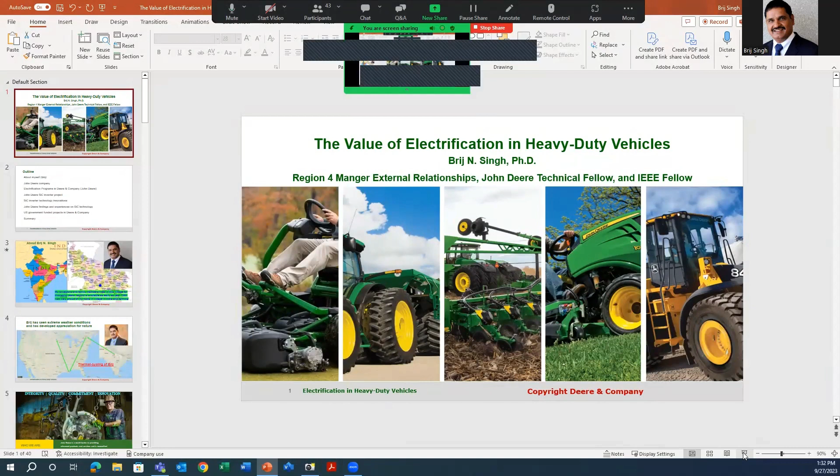Good. So today I will be talking about the value of electrification in heavy-duty vehicles. John Deere has a variety of vehicles, as you see on this screen. One vehicle looks very different from the other. So we are doing electrification for an intentional reason, meaning if the deployment of this new technology is bringing value to our customers, making them profitable, better job quality, sustainability, and also greenhouse gas reduction overall.

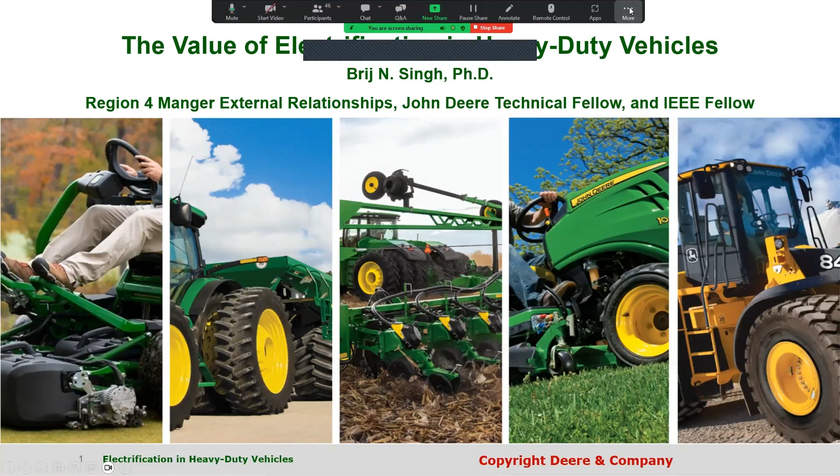Dr. Singh, can I interrupt? I think there is some kind of black screen on your front, on the top, in the middle. I can just minimize it, right? This middle one, right? Yeah, that one. It's gone, right? Yeah, it's gone. Yes, thank you.

So basically the idea is that you want to reduce the overall carbon footprint, and electrification is one of the enabling technologies. In addition to that, a variety of farming practices, including precision farming, require a lot of computational science like AI, machine learning, machine vision, perception, and things like that. So what I'm trying to say is that John Deere is a very high-tech technology company, adding value to our customers who own these vehicles and have farming, construction, mining, and turf care operations.

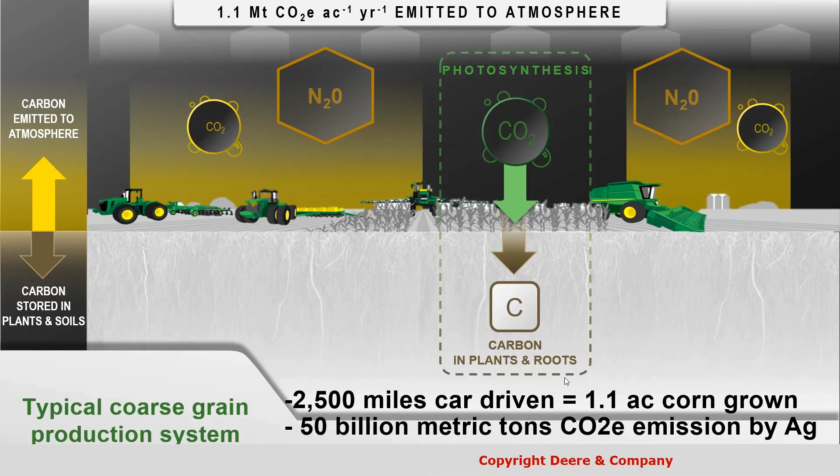So can automation, can precision agriculture minimize overall carbon intensity? So that's what we are working on, applying new technology in our product. So I will play a video here. It is just about how precisely you are putting seed on the ground. And next slide, I will explain the importance of that precision work.

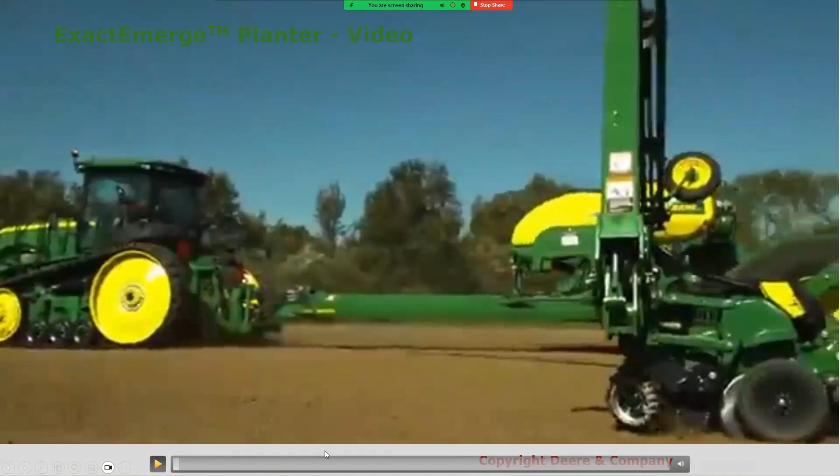Are you hearing the sound? Please confirm if you are not hearing, because it seems like, yeah, you should be hearing, sorry. Yes, we have sound.

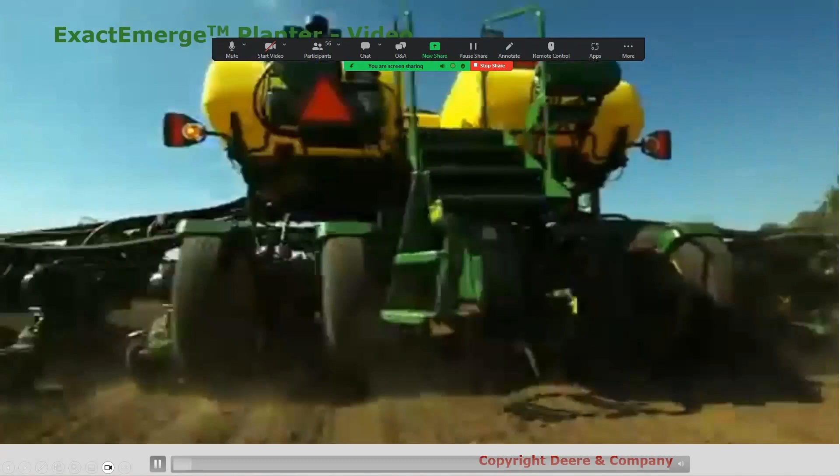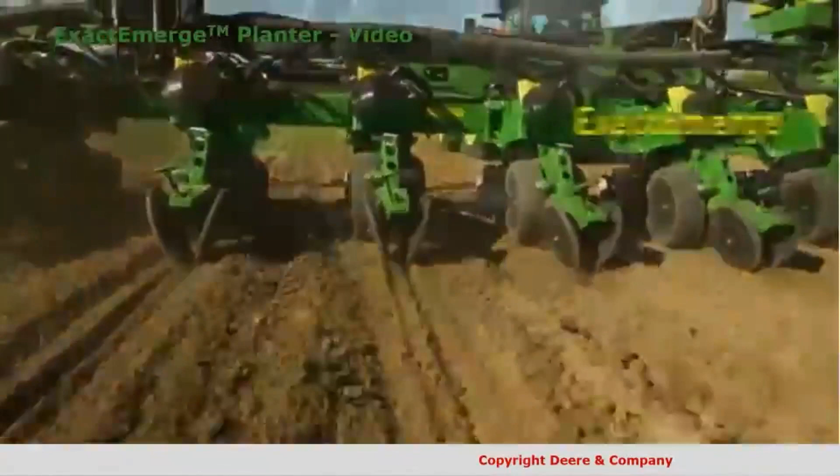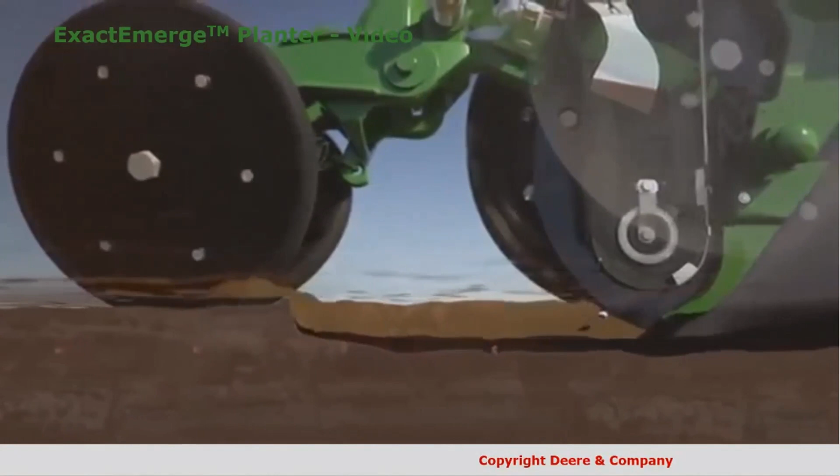At John Deere, we've continued to push the boundaries so that we can offer growers as many profit-generating options as possible. But to get to that truly next level of performance, we took a giant leap to ensure that you get higher levels of yield and productivity. Let's take a closer look at what separates the game-changing ExactEmerge from other planter row units. As you can see, there's no seed tube. Know what else you don't see? Seed rolling in the trench. We replaced the seed tube with a new delivery cartridge, the heart of this revolutionary planter technology. Inside, you'll find the brush belt, which delivers seed directly into the trench on a dead drop, with no roll, at up to 10 miles per hour.

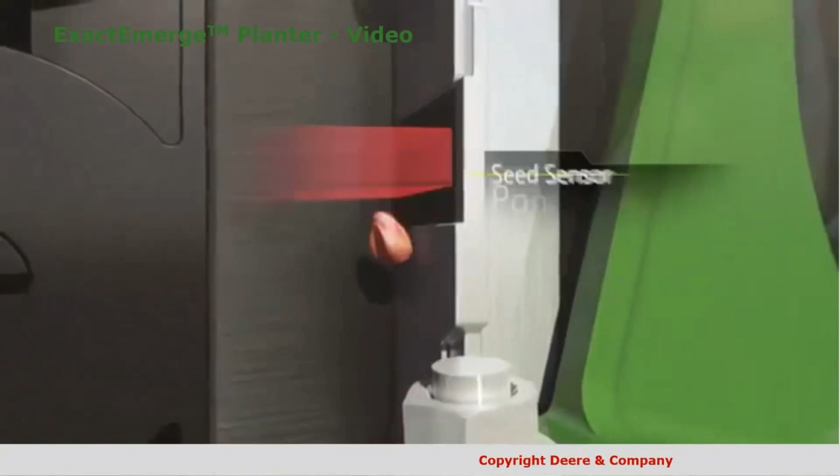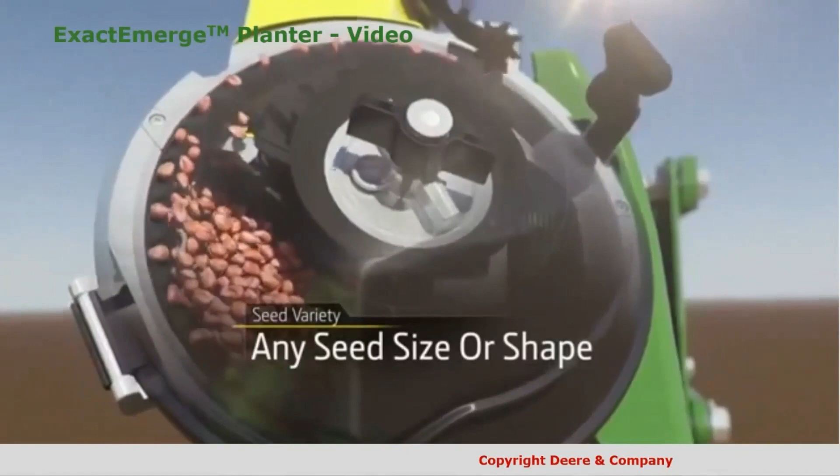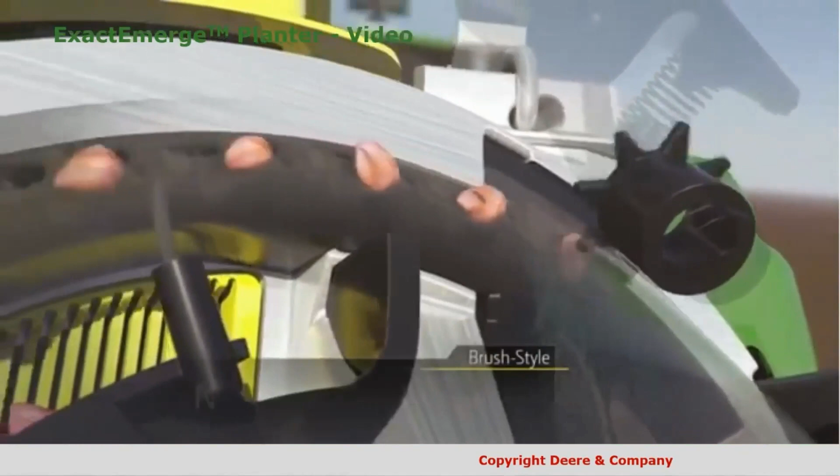Each seed is carried by the brush belt, but not before passing by our all-new seed sensor. Think of it as another set of eyes where you need them most. Population, singulation, spacing information. It's all gathered at the sensor. Every precious seed is carefully spaced and carefully placed. The new bowl-shaped disc singulates your seed, while the concave shape allows the brush to grab each one effortlessly. Watch how these paddles push seed into the center of the brush belt so you can feel confident knowing there's a secure handoff every time. And thanks to the improved brush style doubles eliminator, only one seed rests in each hole before the disc hands it over to the brush belt. This allows you to enjoy the highest possible singulation. Of course, this high-efficiency meter system wouldn't be complete without a superior vacuum.

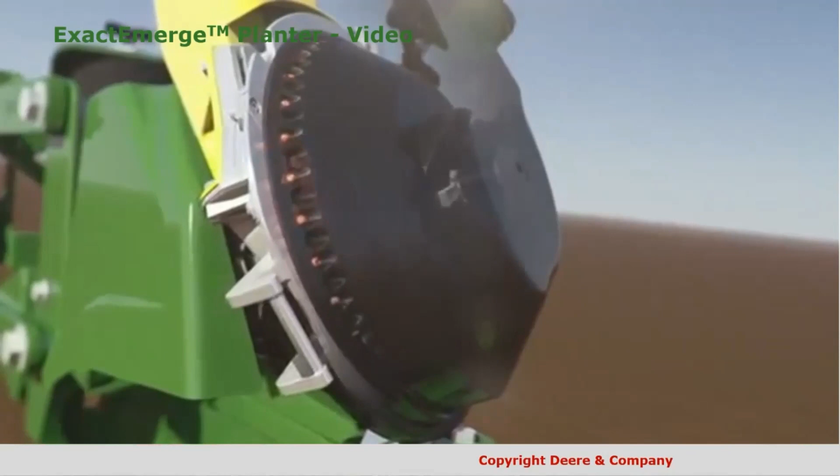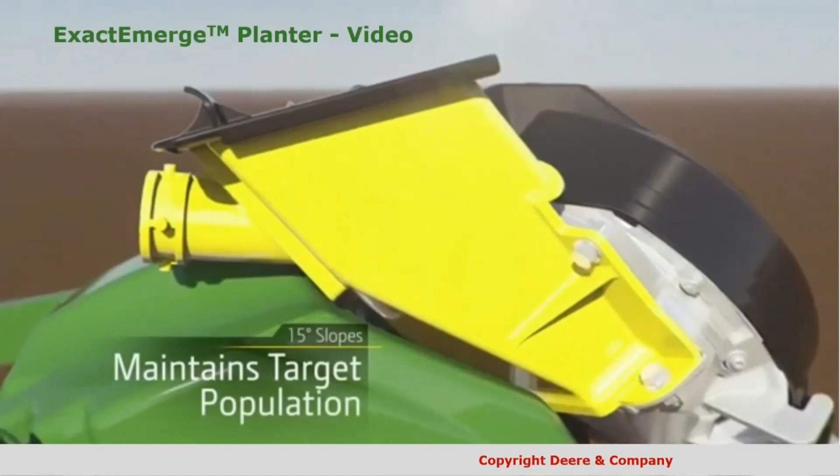That ensures the disc holds the seed tightly before it's passed on. Check out the new hopper design that helps you get the most of your seed pool by maintaining target seed population on slopes of up to 15 degrees in any direction. But there's more. 2 independent electric motors keep ExactEmerge running smoothly. One that rotates the meter, the other turns the brush belt. This gives you the speed matching delivery and population only ExactEmerge can offer.

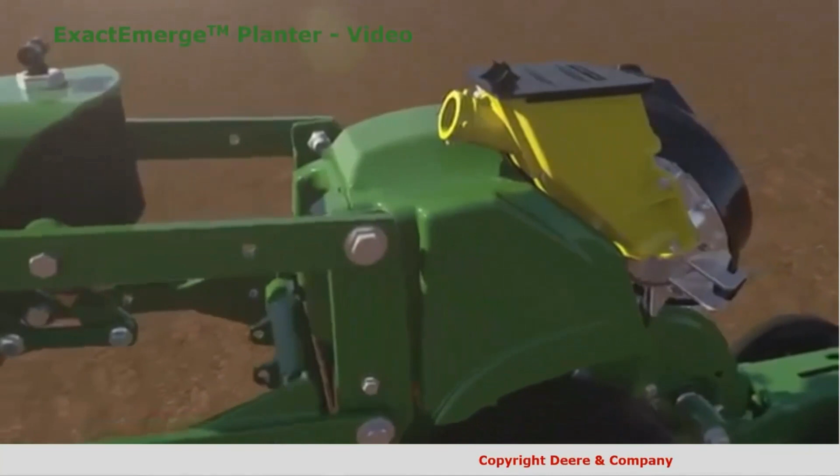Not enough? How about the fact we've made active pneumatic downforce standard on this planter? And when paired with the new brush belt delivery, you get optimal depth for maximum yield at 10 miles per hour. Just set the downforce margin you want and run confidently. It's that simple. Finally, a planter with no trade-off between speed and accuracy. A planter that buries the myth of only planting at 5 miles per hour. A planter that marries precise seed placement and productivity. It's the all-new ExactEmerge row unit from John Deere. Accurate at 10 miles per hour.

Exactly. So essentially what you saw here is that no matter what the soil condition is, you are precisely placing seed on the ground so that all the plants emerge above the ground at the same time. So that's why we began calling this product ExactEmerge. And then whether there's a 15-degree grade, elevation, all that.

And then it is like 40 robots walking behind the tractor at 10 miles per hour, and each robot is driven by GPS. So when you are turning, some of them are turning slower, some of them turning faster, so that you are making sure that the seed-to-seed spacing and row-to-row spacing is actually constant, right? Not varying, whether you go 5 miles per hour or 10 miles per hour.

So there's a science behind it: if seed placement is precise, then the grain production will go up by quite a percentage. And if you plant it at the right time, right? Because if you have a 10,000 acre farm, how can you plant, right? You need to go 3-4 times faster. So this technology has allowed us.

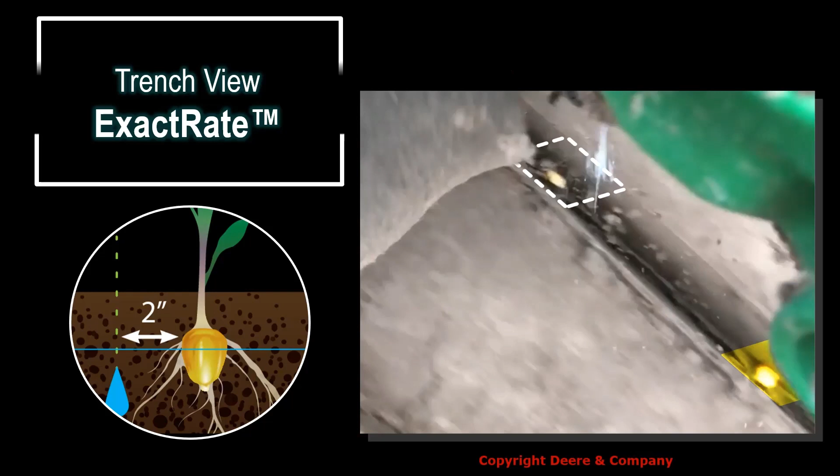So it's such a precise process. Imagine that you are going 10 miles per hour, you're turning and slowing down, whatever, and it is still able to place the seed on the ground, and still able to put a very small amount of fertilizer. You could have fertilized the entire row, right? The entire furrow, but that would be a waste of fertilizer, and that may cause carbon intensity.

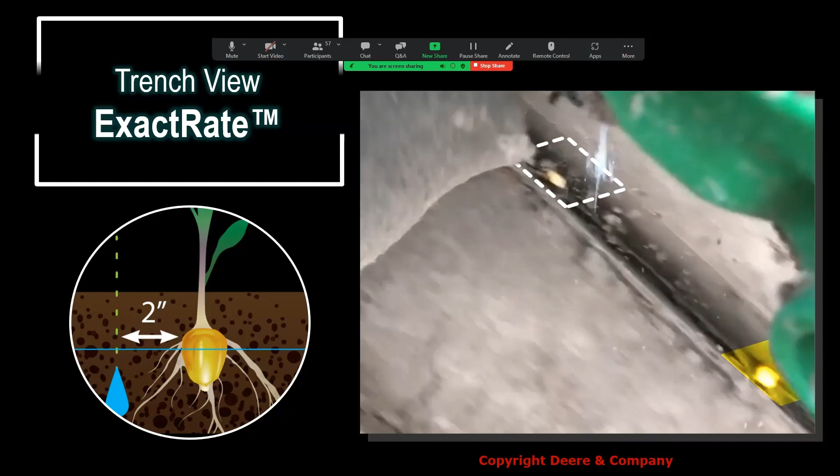So this is actually the value of electrification, and those power converter fed electric machines are actually the enabler. Before that, our previous product was about 3-4 miles per hour. This goes as high as 10 miles per hour.

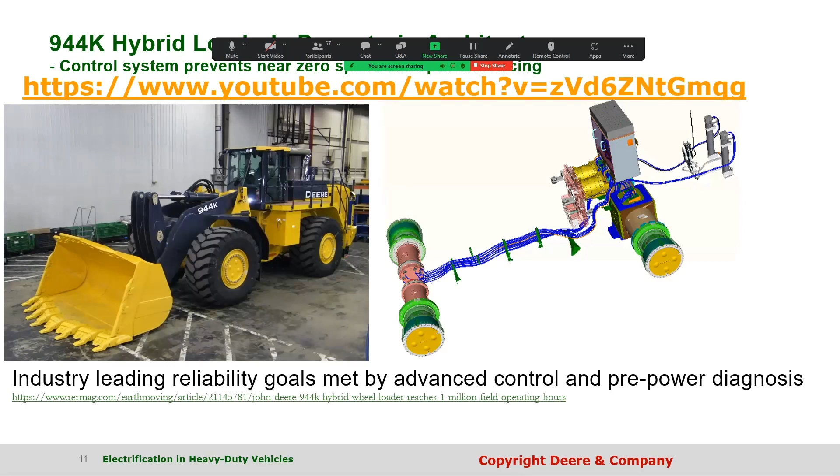So some electrification examples from when I started at Deere and Company. So this is one loader that I worked on. There's a YouTube video, I plan on not playing this, but the electronics that I designed for this may have seen close to 40 to 50 million field hours, because all the loaders that we put in customer hands have seen 1 million cumulative hours, and there are 40 such circuits that I have designed for this product. So this is how we do the reliability calculation, right?

So 40 times 1 million, 40 million, and that was 2020 data. So by now it could have exceeded that. And the good thing is that not a single failure. So as you know, Deere is known for product quality, right? So this one, without electrification, we would not be able to do it.

So Deere has the largest engine size. Now they are making another larger one, like a 20-liter engine, but the 13.8-liter engine is roughly 500 or so horsepower. If we did not do electrification, we would not be able to put together this vehicle. So there was a conventional vehicle that consumes 24 gallons of diesel per hour while working, and this one consumes under 10 gallons.

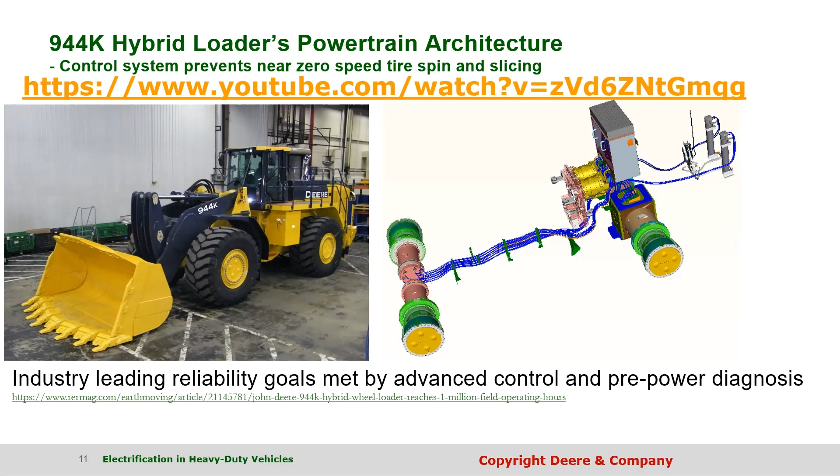So there's nearly 60% fuel saving when you begin to calculate, right? Imagine that if you burn 1 liter of diesel, depending upon whether it's petroleum diesel or a biodiesel, like an ethanol mix, it can put out as high as 12 kilograms of carbon dioxide. So by cutting from 24 gallons per hour of diesel to under 10 gallons, we are cutting a multi-million metric ton carbon footprint by electrification. So that's kind of a sustainability story.

Another thing is that control has allowed us to cancel the tire spin, because these vehicles are used in quarry mining and surface mining, not underground. Often in mining operations, the road is not paved. There are always some pointed objects, and if the tire spins, you can ruin the tire, and tires are very expensive. This is nearly a $1 million vehicle, maybe costing about $900,000.

Another beauty of this vehicle is that the ground torque is 1 million Newton meters. So that is the thrust. You can imagine that if there was an aircraft of this size, it would fly with such high thrust, but it is made to do things on the ground. Without powertrain, without electrification, we wouldn't be able to do it. So I was so blessed to contribute to this product development and its launch.

This is another product that I began working on when I joined Deere. It's a 644 loader. Here we run the engine at a constant speed, as we do in the 944 loader also. Then we produce electricity, and there's a 3-speed transmission system, depending upon the operation: transport, dozing, stockpiling, or whatever. What it is actually doing is electrification replacing the traditional torque converter. It's like energy to power conversion.

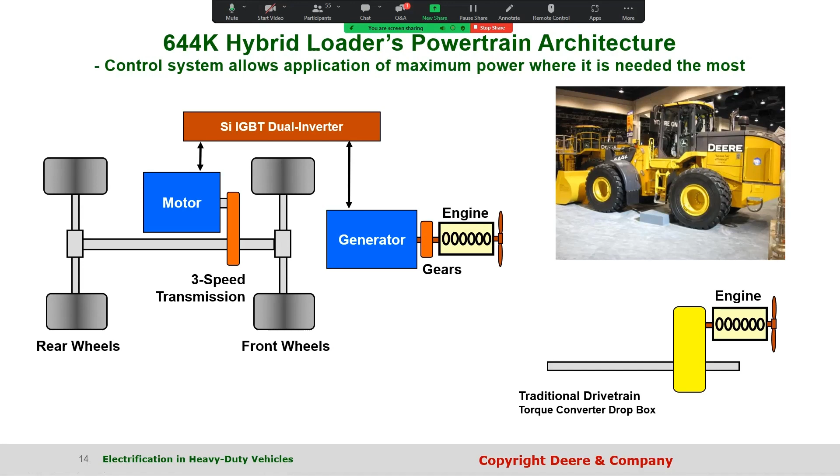So I get asked, okay, these are hybrid vehicles, what is the size of the battery? The answer is the battery is only to crank the engine. Essentially, the diesel engine spins at a nearly constant speed. It can vary now and then, but usually, compared to a hydrostatic drive, it's nearly constant speed. Then you have a gearbox, and you run the generator at 3 times the engine speed, which is about 5,400 RPM. Then you produce electricity using a power converter fed electric machine, with the generator driven in voltage mode, and the traction system driven in torque mode.

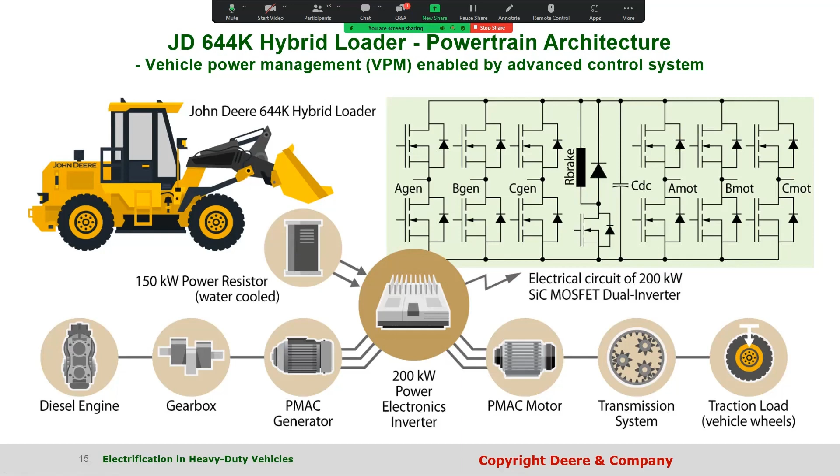When you are slowing down, for a couple of milliseconds the DC bus voltage can go higher than the designed value, so you burn that electricity in this power resistor. It's actually a 150 kilowatt water-cooled resistor. If we did not do that, we would not be able to control the vehicle. So now, if we begin putting in a battery, we can absorb that energy. When we were designing this in the 2007-8 timeframe, battery technology wasn't mature enough and cost wasn't down. But now we can begin putting in batteries, and we began really calling them hybrid drives. You have battery power and engine power, you run the engine at a constant speed, and peak power comes from the battery.

So now I will talk about John Deere's product in PowerAmerica. When President Obama was in office, he began establishing manufacturing innovation institutes across the US. PowerAmerica was the second institute. It was a $140 million effort from the US government, funded by the Department of Energy. And Deere is a founding member of PowerAmerica.

So we drew quite a bit of funding from Power America, and we developed very, very advanced inverter technology. Actually, my IEEE award, the Emerging Tech Award, was based on this work I did for the company and for DOE. So we were given a very, very aggressive goal in the 2013 timeframe: a very, very highly efficient inverter, lightweight, small size, and all that. And then also, as compared to a hydrostatic drive, this inverter should offer more than 25% fuel economy.

And then another objective we signed was that because these wide band gap materials, silicon carbide and gallium nitride, are high temperature materials. These are new generation materials. You can operate them at high voltage, high temperature, high switching frequency, and silicon carbide has a high thermal conductivity. And then failure due to cosmic radiation is not as pronounced as it is in silicon semiconductors. So you can really exploit all these unique properties that are absent in silicon semiconductors. So we wanted to exploit all of them. So that's where the 115-degree number came from.

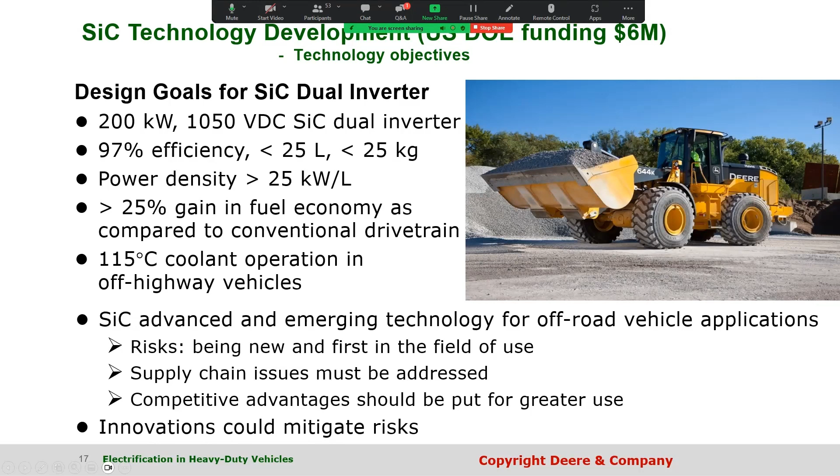And how you could do that is by innovation. So you remember those four core values, innovation is one of them, right? So people like me, and there are many such engineers in the company, are all continuously innovating new products, new technology. Where we ended up after the conclusion of the project: we started in 2015 and in 2021 we graduated the program. So we had a very high power density goal, and we nearly doubled the power density. So a very small size inverter. Next slide, you will see how much smaller it became.

And then the efficiency: 97%, two-stage, power taken in to the inverter, power out from the inverter, because there were two inverters packaged in the same box, more than 97% efficiency. And over the coolant, we proved efficiency of 98% and higher. One inverter alone is 99 point some percent. So very high efficiency inverter technology. And then we did 2-3 generations of development. A lot of innovation went into packaging, thermal management, and things like that. You will see there's a video on it.

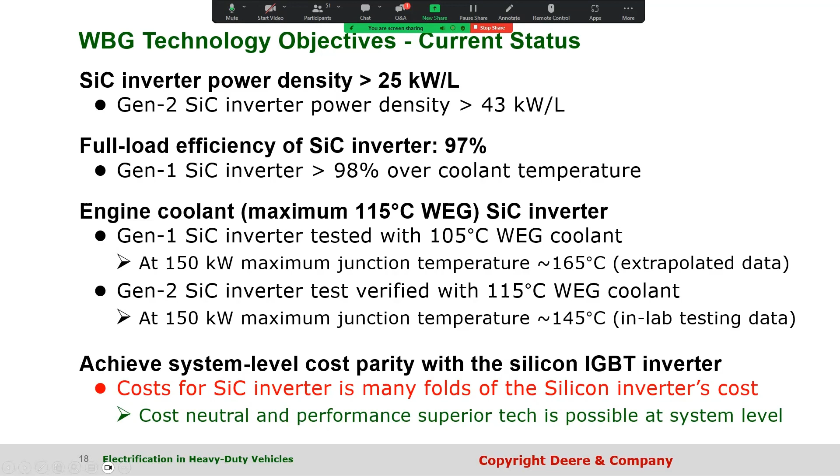So imagine that when we ran, we increased the coolant temperature by 10 degrees, and the inverter was running about 20 degrees lower temperature. And it is all about paying attention to basics like packaging, thermal management, and making sure you are not putting a lot of thermal resistance from the semiconductor to the cooling system in the inverter. And no matter how good this technology is, if it doesn't meet the cost target, it doesn't go anywhere. So our 5-year work indicated that at system level we can design a cost neutral and performance superior solution, and that led us to launch a production program. So in a few years down the road, you will see silicon carbide inverter driven tractors in the market.

And then also the capacitor size reduction. I know in this class maybe a lot of power system engineers are there, but you need to attack this problem from the control standpoint, packaging, thermal management, all that. And we exploited the unique properties of silicon carbide and reduced the capacitor in this inverter from 13,000 microfarad to as little as 440 microfarad. So even if devices are expensive, if you take the system approach, you can get a cost neutral, performance superior solution, and you can deploy such technology.

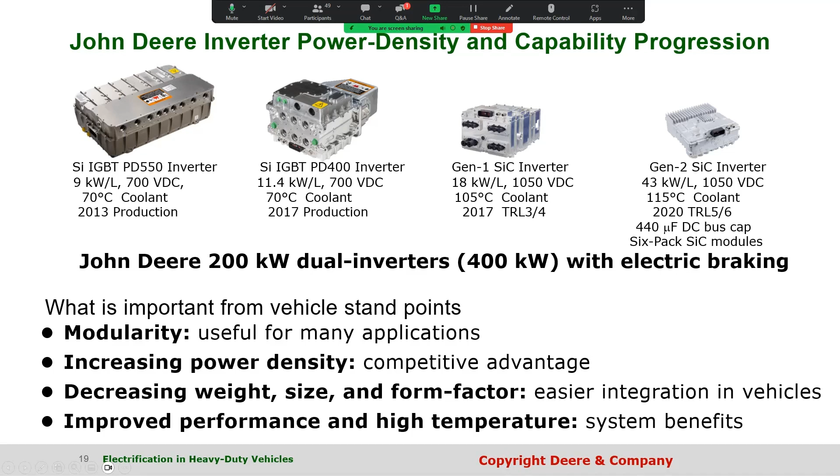Decreasing size and weight, form factor gives easier integration. I once toured our loader factory in Davenport, Iowa, and the fact that a vehicle can rotate to the same manufacturing station over and over, that's adding manufacturing cost. So if you minimize the component size, that can help cut down the manufacturing steps, so it lowers your manufacturing cost, and either you are more profitable or you are passing that saving to your customer, and you are more competitive. And improved performance and high temperature gave us system benefit, easier integration on the system.

So why are off-road vehicles so different? It is the near zero speed requirement and stall torque. As you know, on-road vehicles, you accelerate and you go, right? Off-road vehicles, if you want to go from point A to B, oftentimes you must hit something, right? You hit crop, you hit tree, you hit concrete. On-road, you want to go from point A to B without hitting anything, right? That's a very different design paradigm.

And then oftentimes you are operating near zero speed. And that is very, very taxing to the power electronics. So design requirements as compared to on-road vehicles are quite different. So we need to be mindful about that and design the product for how these are being used in the field. So we did 3 generations of silicon carbide work.

As some of you may be acquiring government funding — writing the grant application and all that is not easy, but I would say an easy process. Doing the work, doing the project is completely different, right? A different magnitude of difficulty. So when I had this funding, at that time we did not have any idea about what silicon carbide is all about, just book knowledge. So the idea was that if you are working on some risky technology and you have risk of failure, then fail fast or experience fast and move on.

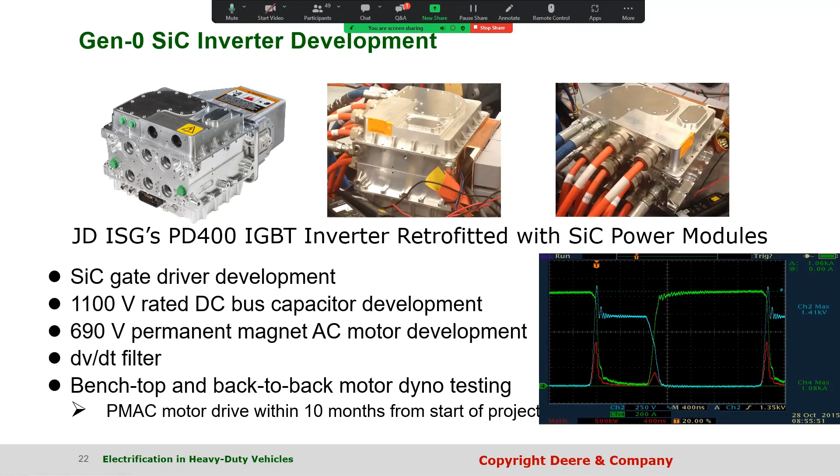So we did gate drive design, we did capacitor design, all in-house. We took our PD400 production inverter and pretty much retrofitted it with the silicon carbide module and capacitor. We also did some dV/dt filter, meaning making sure that a motor fed from this inverter doesn't experience a lot of transients, sudden voltage swings and all that. That's detrimental to insulation, bearing current, common mode voltage and current issues. But with no knowledge in this technology, within 10 months, we were spinning the electric machine with silicon carbide. So that's kind of the beauty: if you are in the technology development space, speed and scale are extremely important to be successful.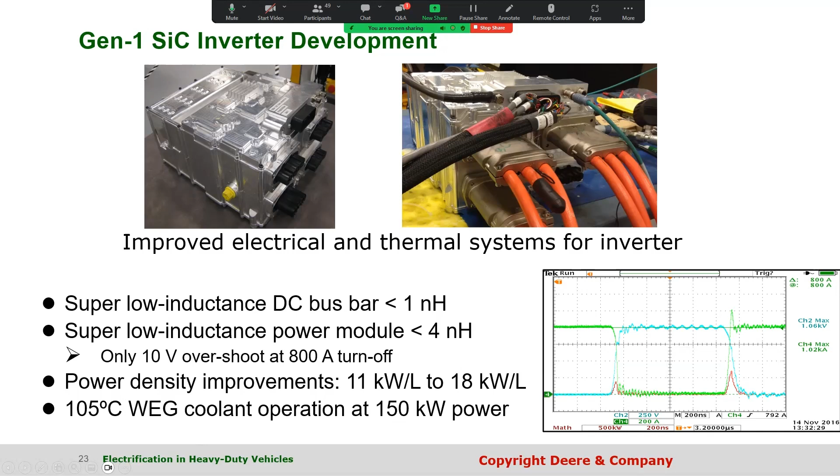Then we put our Gen 1 inverter, which is basically its own silicon carbide inverter in its own housing. Remember, our goal was 25 kilowatt per liter. We missed that goal, but we applied a super low inductance bus bar, nice packaging, thermal management, and we qualified that indeed this can run with engine coolant and continuously operate at 150 kilowatt power and 200 kilowatt peak power. And then in 2017, Deere management had quite a bit of funding for me and the team.

You saw those boxes, right? Sometimes both inverters are sandwiching the cold plate. In this case, it was different. So minimizing the inductance between generator and traction inverter helped us develop advanced control. And then we achieved our power density goal.

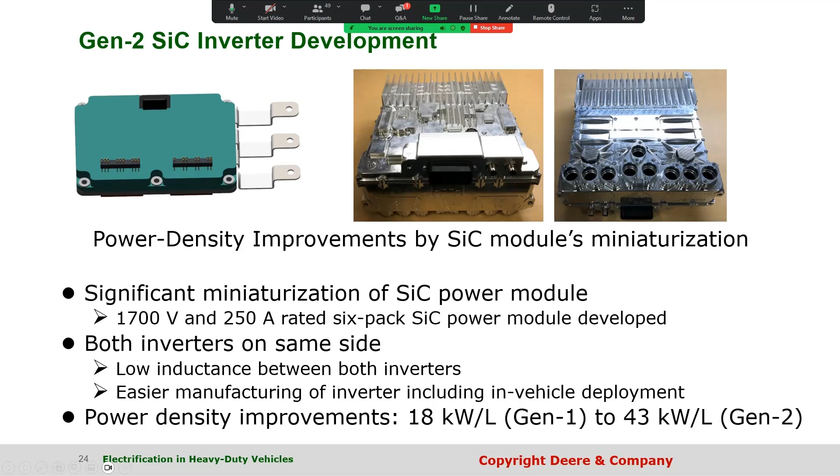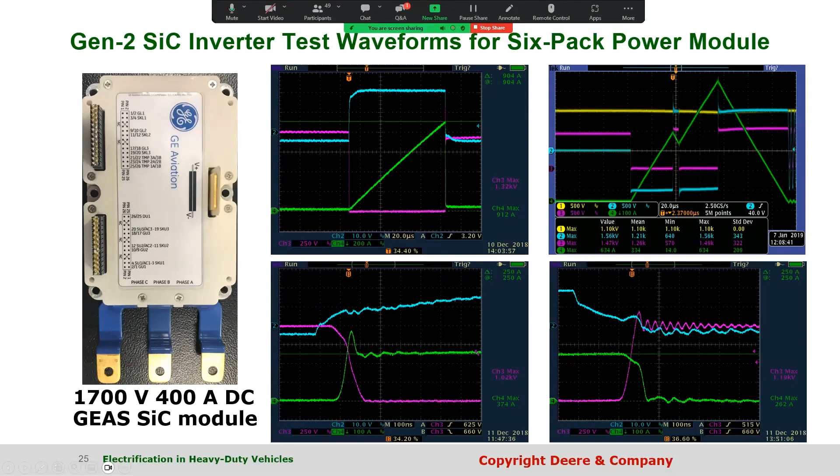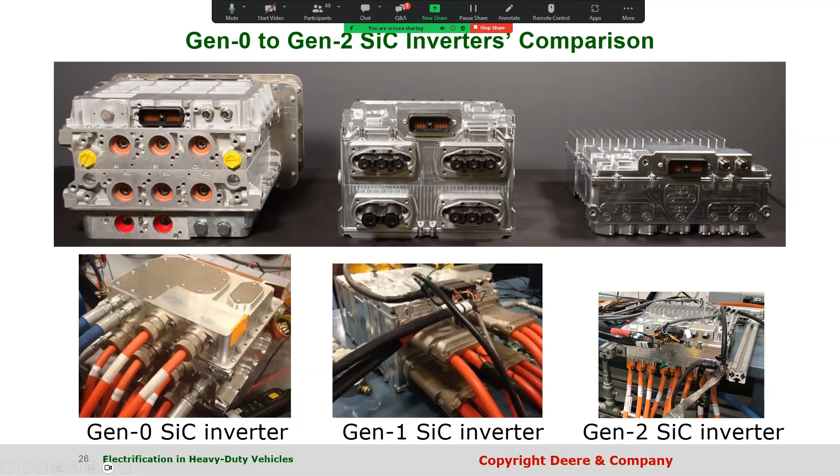So from those $6 million plus quite a bit of funding from Deere, this project became nearly a $12+ million program, and we got from here to here in 5 years. So it takes quite a bit of effort to get this done. From a 35 kilogram inverter to under 9 kilograms, much smaller footprint, a lot less material, easy to put motor and inverter together, and essentially we can even eliminate the cables here. And that's one trend I'm seeing in industry: people are putting inverter and motor together in advanced cars, so it's coming, and Deere is doing it too.

So I think I have time, so I'll play this video. And this will talk about quite a bit of innovation that has gone into our silicon carbide program.

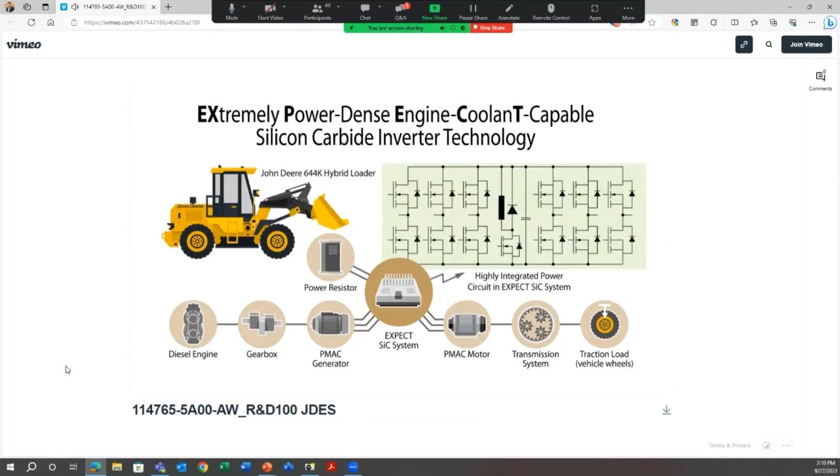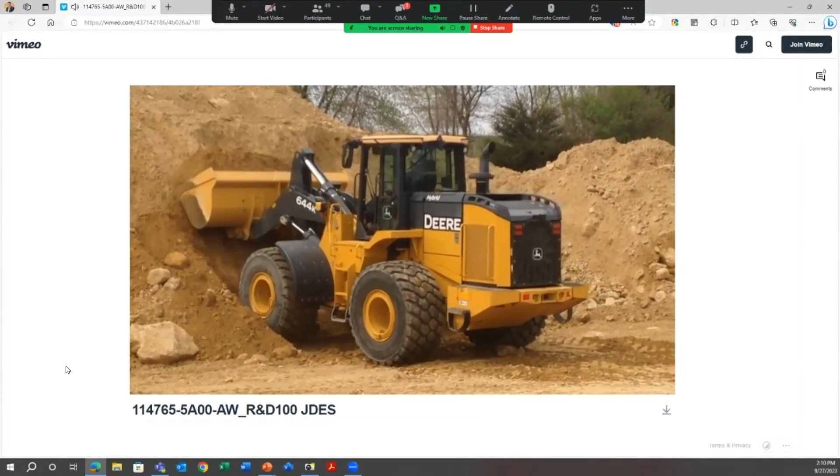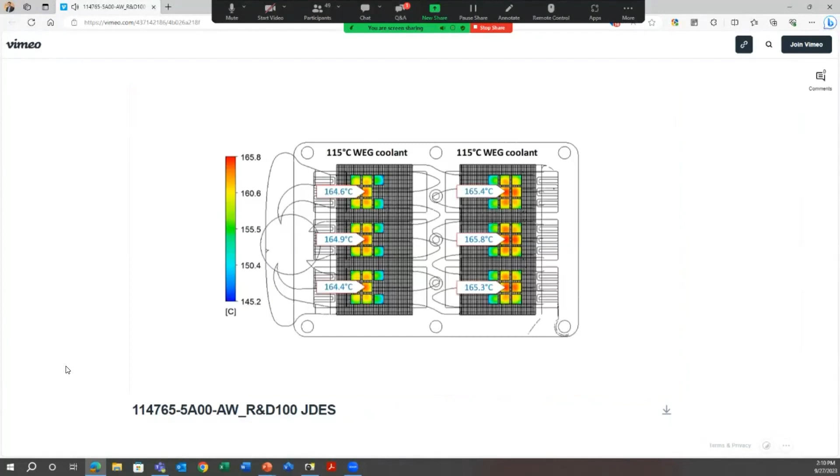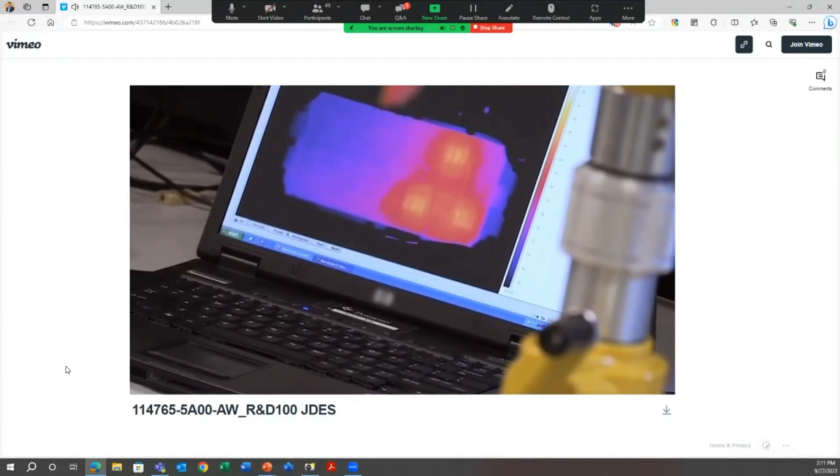Introducing the first of its kind, extremely power-dense, engine coolant capable silicon carbide inverter technology for the electrification of heavy-duty vehicles from John Deere Electronic Solutions and the National Renewable Energy Laboratory. The compact, market-ready Expect technology offers high efficiency and high performance power at the extreme temperatures required of heavy-duty construction, mining, agriculture vehicles, and on-highway trucks and buses. The market-ready EXPECT silicon carbide technology can enable companies to meet emissions guidelines without sacrificing vehicle reliability. Key achievements in the design of the Expect technology enable a higher power density of 43 kilowatts per liter alongside advanced circuit protection and thermal management for coolant temperatures up to 115 degrees Celsius. The converter system also has the potential to increase fuel economy and reduce daily operating costs.

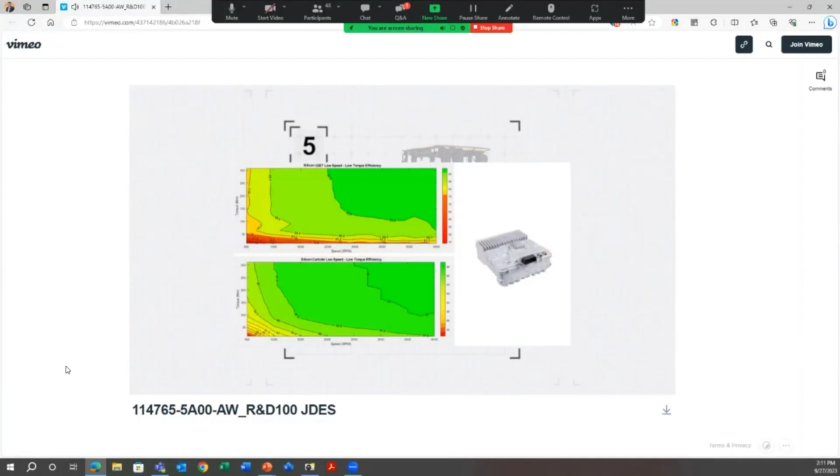These achievements include: 1. Packaging innovations combining 2 silicon carbide inverters. 2. A power module with integrated thermal management for engine coolant integration. 3. Gate driver design to enable high temperature operation. 4. Advanced protection features necessary for fast switching silicon carbide power devices. 5. Very high converter efficiency at full load and significantly improved efficiency at partial load. 6. Clamp-on current sensor technology for manufacturing simplifications and hotspot temperature elimination. 7. Active and effective cooling to prevent heat spread from the electric motor to the converter. 8. Novel packaging of optimal size DC bus capacitor module to prevent capacitor overheating. The market-ready EXPECT silicon carbide technology can enable increased fuel economy, improved inverter and motor assembly without requiring power cables and power connectors, improved integration of electric drivetrain in heavy-duty vehicles, simplified vehicle architecture, eliminated dedicated cooling pack for inverter, and reduced daily operating costs due to increased fuel economy.

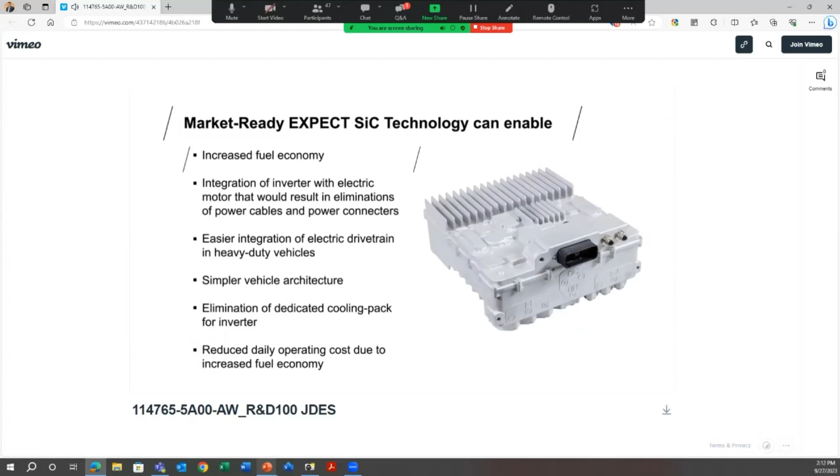So one of the pictures that you saw in the video talked about partial load efficiency. In an on-road vehicle, like I'm driving a hybrid, right? My car has a power mode, eco mode, and also a charging mode. Essentially, most of the time the vehicle operates in eco mode. That means your engine is putting out about 30% load; the overall powertrain is putting out 30%. So you don't need to be super efficient at full load, because the majority of the time, unless you are hill climbing, you aren't operating at full power, right? So partial load efficiency is extremely important.

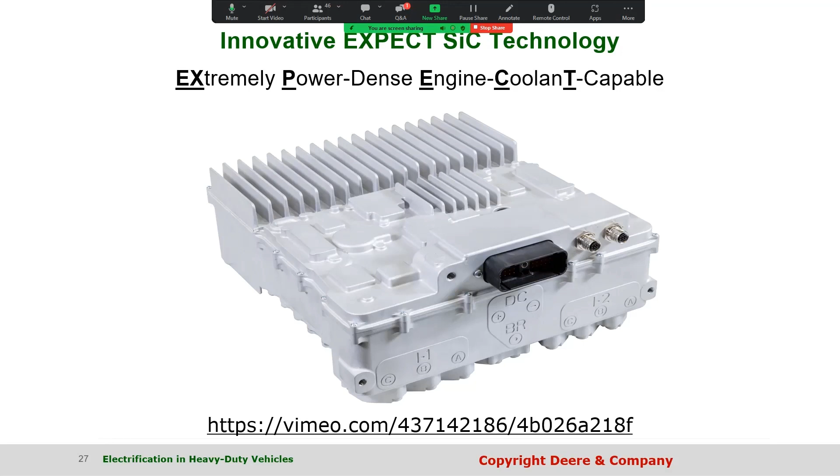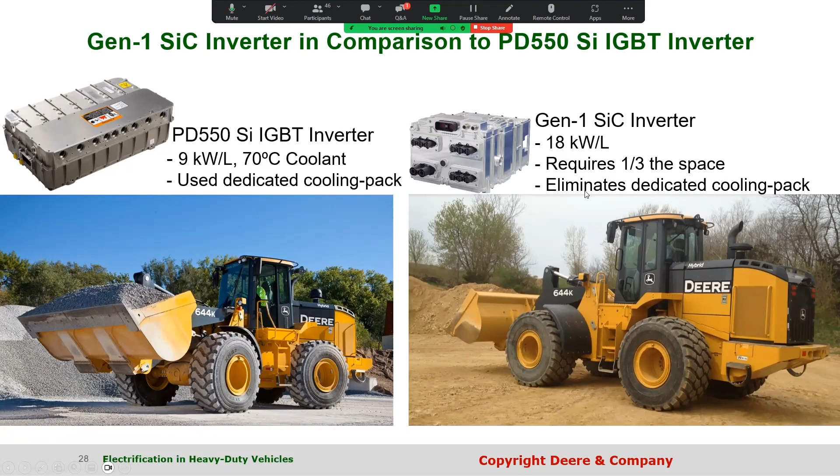So then we had this PD550 inverter that went into our production 644 loader. We hosted DOE and put in our Gen 1 inverter; we needed to modify the cabinet. Actually, the inverter is right there, but you climb in the cab. It requires much less space, and Gen 2 is even much smaller than that.

So what are the lessons we learned? IGBT mindset, like traditional mindset, doesn't work. You need to go out and exploit the unique property of the material, wide bandgap silicon carbide material properties that I mentioned earlier, and you need to pay attention to overvoltage, cable, connector, all that. And one of the experiences: when you talk to inverter experts, they would tell you the connector is one of the things that fail. So you need to pay attention to these low-hanging fruits that people often ignore.

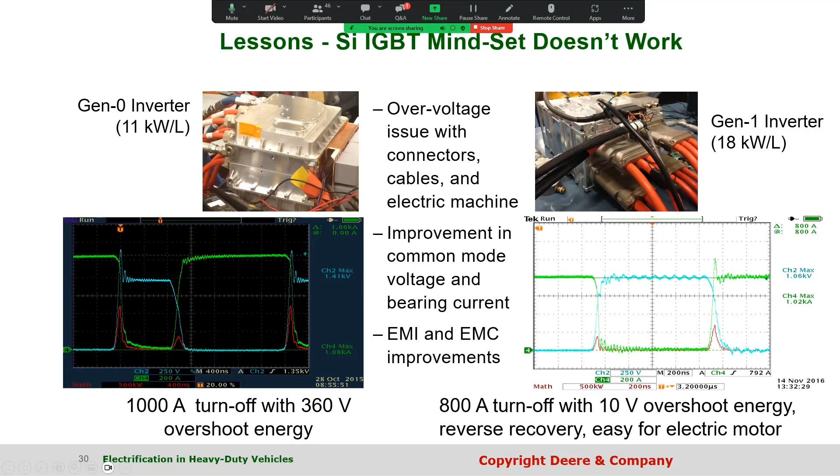And then you need to pay attention to common mode voltage, current, EMI, EMC. And when we did good packaging, our Gen 1 inverter has very low overvoltage. So when you are turning off the device and the device turns off with a transient like this, it's very, very bad for the health of the motor bearing, motor insulation, all that. So this technology, nice packaging, has allowed us to cancel these effects, and also solve the EMI, EMC issue.

So then we thought, okay, let's qualify it over a wide range of ambient and coolant temperature. So we swept the ambient condition, going up to 75-degree ambient. And once we ran coolant more than 90 degrees C, we couldn't operate at more than 60 kilowatt continuous. We wanted to operate 150 kilowatt continuous, 200 kilowatt peak power. We couldn't do it. And the reason is that it was not the power module heating up. There were some components heating up.

So heat rises. Usually 95% plus of the heat produced by the power module is taken by the coolant system, but 5%, that's what heats the air inside the box. So if you do thermal management, thermal treatment, once we did that, we were able to run 55 ambient, 115 degrees C coolant continuously flowing through the inverter, no issue whatsoever. And the beauty is that the capacitor was 85 degrees C technology, a lot of low voltage electronics was 85, but this is 175 degrees C technology. So packaging and thermal management has allowed us to marry technologies of different temperatures.

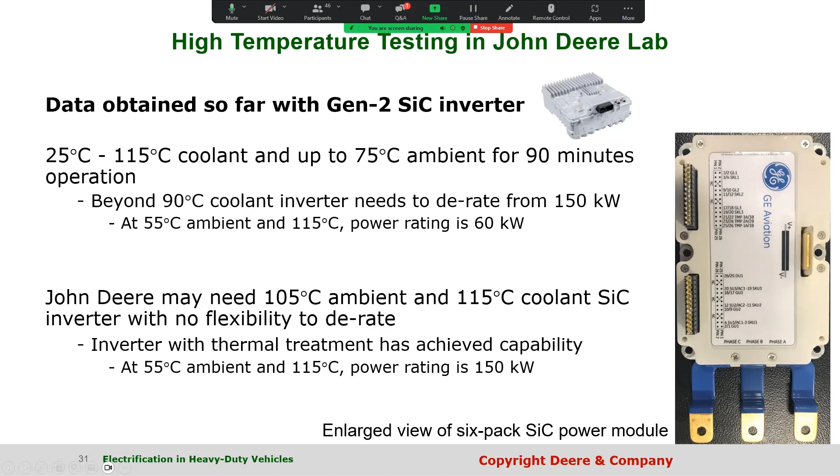So then innovation by 9C solutions. So when I started this project, I began counting those Cs. So can we reduce the capacitor? We did. We reduced the capacitor size by 5 times, cost by 10 times. We went from 70 degree coolant to 115. So we can simplify the vehicle architecture. The connector was simplified. Then the overall size of the inverter went down, and the material intensity in the product went down.

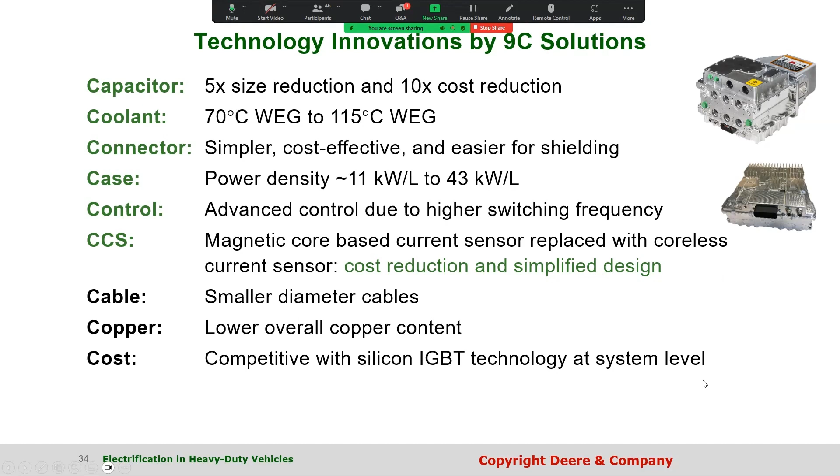We applied advanced control. We used a coreless current sensor. In a current sensor, actually, the heating happens because of the switching frequency, because of the fundamental frequency, and because of the fundamental value of the current. So the magnetic core heats up in the sensor, so we eliminated the core itself and ran a coreless current sensor. A lot of treatment was needed, but we were successful. We are in the process of eliminating cable. We cut down a lot of copper. And of course, at system level, we are competitive compared to traditional silicon IGBT technology.

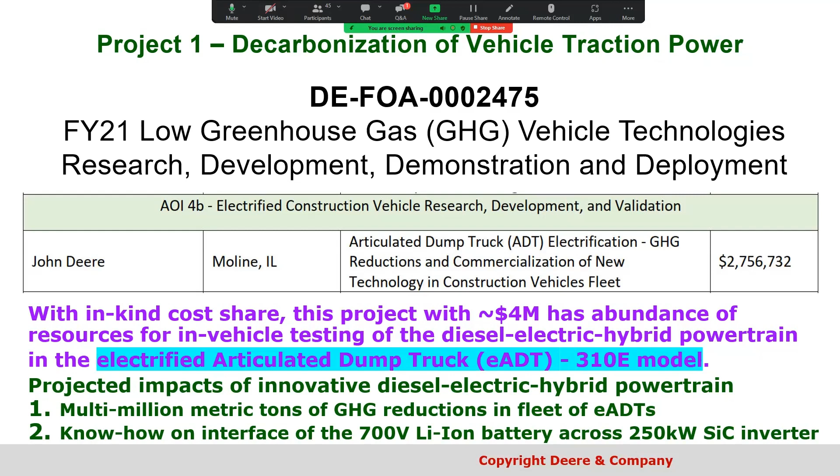And as you know, success feeds success. So I'm pretty much a known expert in DOE circles. I get called to a lot of advisory meetings, planning, road mapping and all that. So we acquired one more grant in 2021. It's a nearly $4 million program with Deere match, nearly $2.75 million coming from government. And we would be putting in a diesel electric hybrid powertrain, meaning we would be putting a battery along with the diesel engine to downsize the engine and make the vehicle more productive and performant. So a lot of work on battery control, power management, and things like that.

And Deere is aspiring to put out a lot of battery powered vehicles. It's known; you can look at public releases from Deere. In fact, we bought a battery company. That's public knowledge. In fact, yesterday there was a LinkedIn release that Deere did a groundbreaking for a battery factory in North Carolina. So we would be building batteries in the US, but this project is about developing the charger. So today we take fuel to the vehicle. Tomorrow we would take the charge to the vehicle. So this is a mobile fast charger.

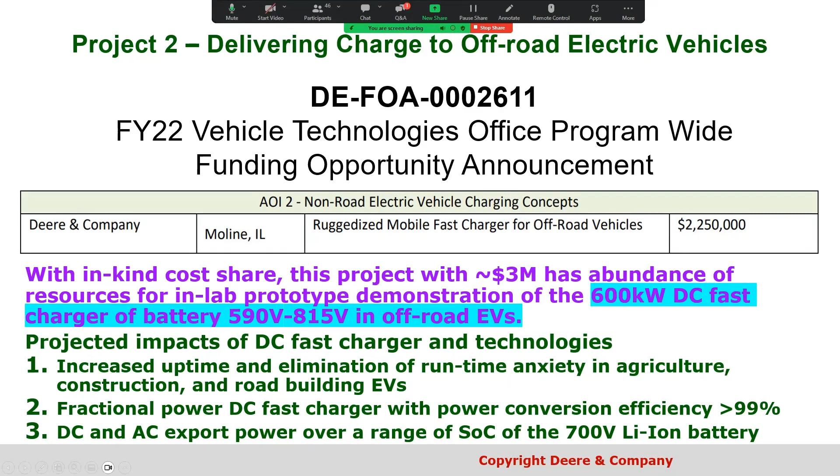So this is another project funded by government. So currently I'm working on a nearly $7 million government program. There are two other programs that I'm indirectly working on with our collaborators. So that, and then I would summarize. So silicon carbide power is real.

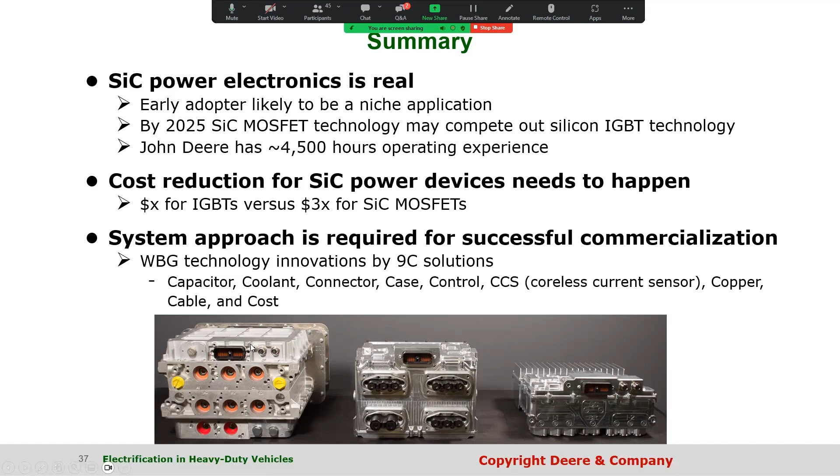You need to find unique applications. You cannot put it everywhere. You need to see where silicon IGBT technology cannot enable a certain form function. That's where silicon carbide can go in. Even if component-level cost is not met, you can do system-level cost. A system-level cost-neutral, performance-superior solution can be designed, and you need to do innovation. And we applied innovation by 9C solution. So that brought us from here to here.

And of course, Deere management, Deere team, my team in Deere, I'd like to acknowledge them for the work I presented today. With this, I would be happy to answer any question you have.